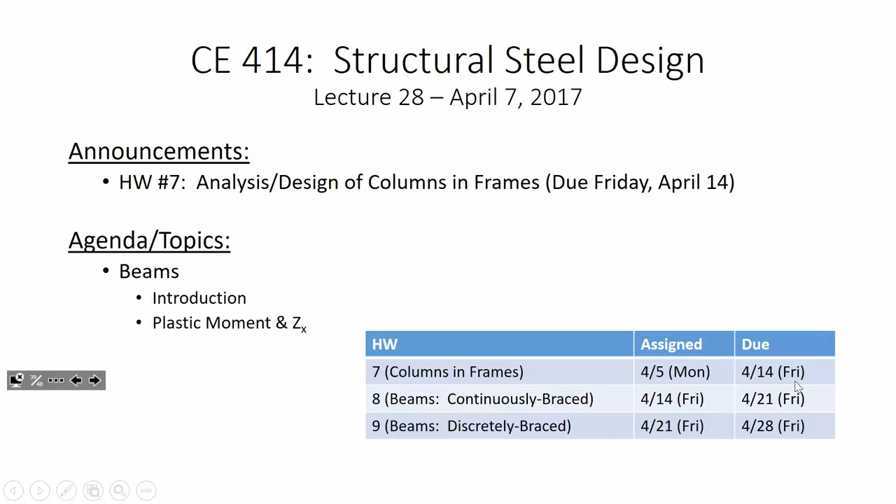Does anybody have any questions on homework 7? Because I know you all are almost done with it, right? Oh, so you've had plenty of time. I can just feel the sarcasm. I can feel it. All right.

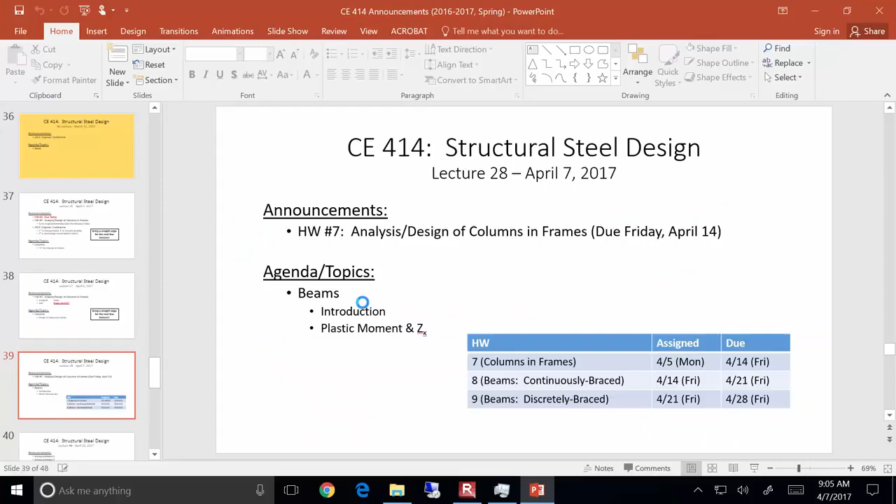Okay. Now, today, you get to see my best slide ever. My best slide ever. What's that? No, it's better. Better. Okay. So you're going to see it in your handouts. You're going to go, what's going on with this? And then you'll understand why.

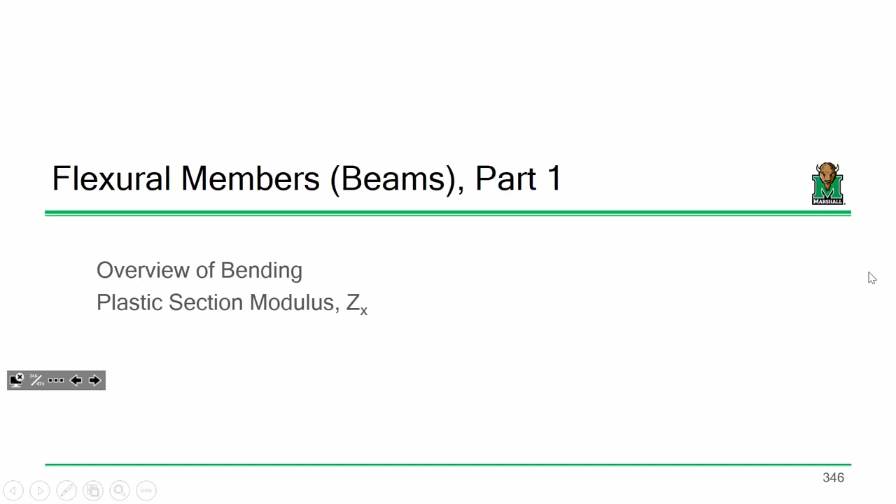Okay, so we're beginning our discussion on beams. And I want to just go over bending in general and also talk about a very important parameter related to bending, which is Zx, the plastic section modulus. To start out, let's just sort of take it one step at a time. So the big difference between tension members and compression members is that members in compression like to do this thing called buckling. Okay, tension members really didn't. That wasn't an issue, so we never really were concerned about the stability of a tension member, but we were with columns. Well, with beams, it's really no different.

I mean, with beams, you have a portion of the beam's cross-section that's in compression, the top's in compression, bottom's in tension, so a beam is going to want to buckle as well. Okay? Now, the way a beam buckles, or its buckling capacity, is a function of how far apart your braces are. Now, your braces could mean a number of things. They could mean cross frames. They could mean other beams tying in, the floor system itself. We'll get into that. But we will create a term throughout this discussion called the unbraced length, and we'll call that L sub b. And an L sub b is related a lot like a column's slenderness.

In other words, the longer LB is, the longer the space between braces in a beam, the weaker that beam is, okay? Because it gets more slender and it wants to buckle. However, because of the mechanics associated with beams, a beam may reach its full capacity before the beam buckling happens. Now, its full capacity takes a little bit of discussion.

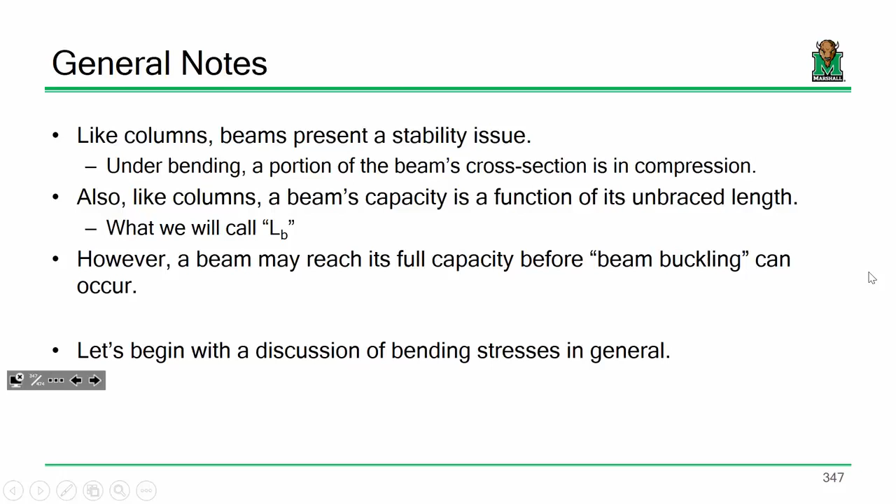It's not as simple, well, actually it is simpler mathematically than what you did in Engineering 216 when you took mechanics of deformable bodies. It's actually a little easier than the yield moment and whatnot. And I know everybody in here is an expert in mechanics of deformable bodies, right? You all love that stuff. But I will do my diligence and do a quick review of some of the stuff that's relevant in Engineering 216, just to bring everybody back up to speed.

So beams, I mean, if you graduate with an engineering degree, if you ask me, for any student graduating with a civil engineering degree or a mechanical engineering degree, if there's one topic that I want a student to understand, it's beams, period. Shear and moment diagrams, beam analysis, beam design, deflection, beams, period, in a nutshell. It's the one thing I want students to be able to understand because they're just so fundamental, okay?

Just about any system that you are designing that has forces on it, whether it's a building, a bridge, an airplane, a car, has some pieces in it, or the system itself is being bent in some fashion or another. There's something in that system that's probably being bent, okay? So because something's being bent, you have to understand how to handle bending stresses, okay?

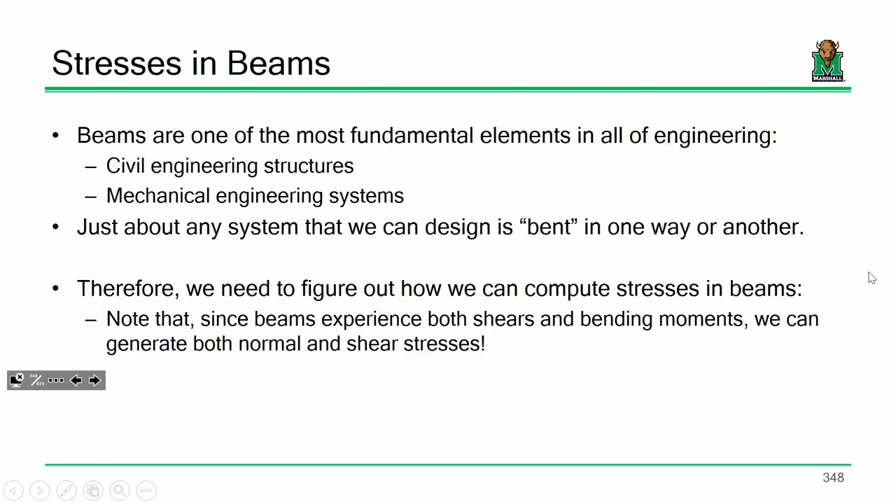Now, beams experience shears and moments, so they would develop shear stresses and bending stresses. In concrete design, we handle each of those independently, and we're going to do the same thing in here. We did bending moments first, and then we tackled shear. It's going to be the same thing in here, although the shear discussion that we have in here is going to be very, very short because there's not really a whole lot to say about it. So let's go back to fundamentals.

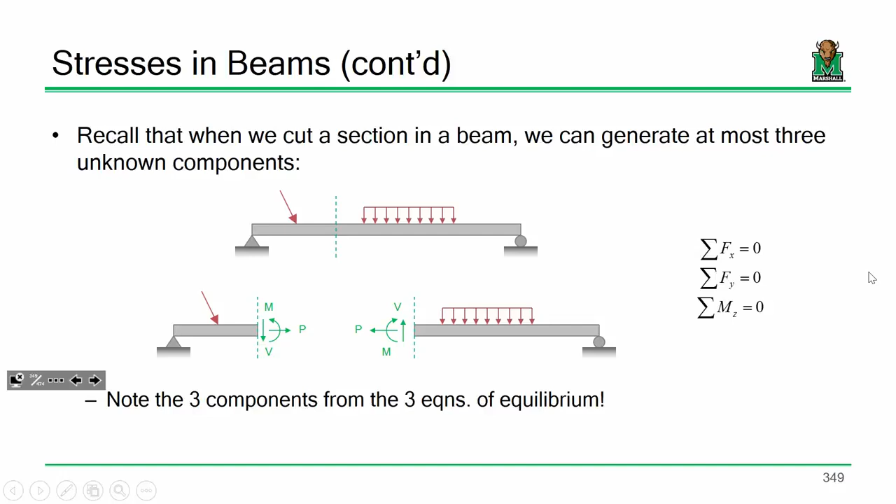So I have a beam, samurai sword, or lightsaber, or cake cutter, cutting through the beam. If I'm treating this as a two-dimensional system, then there are at most 3 unknown resultants inside the beam. Some unknown axial force, some unknown shear, and some unknown moment. Those 3 unknown resultants, I essentially solve for using the 3 equations of equilibrium, right? Sum of forces in the x direction, sum of forces in the y direction, sum of moments. 3 equations, 3 unknowns. That's structural analysis in a nutshell.

Now, as we'll see in a moment, I even put, no pun intended, on the slide.

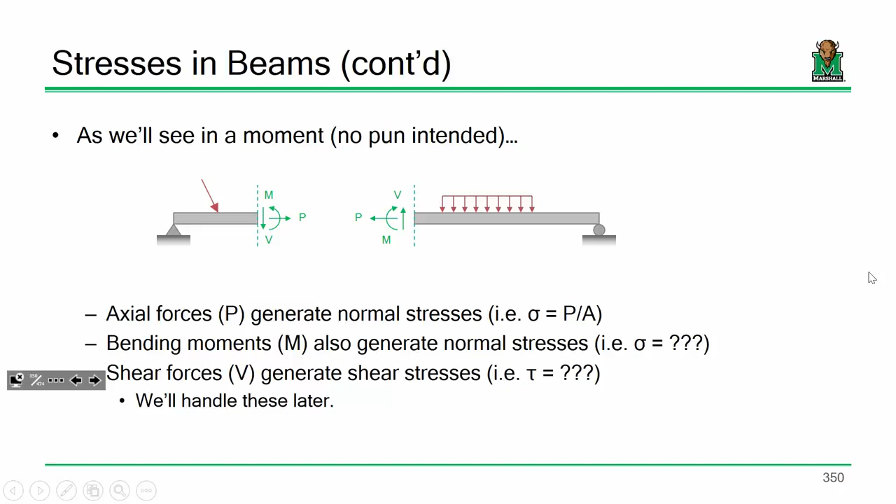Now, bending moments and shear forces generate normal stresses and shear stresses. The shear stress, I'm going to worry about that later, but right now I want to focus on that bending moment, okay? Now, in order to make these derivations, we're going to make some basic assumptions. One of them is linear behavior. We're going to assume that the beam is behaving linearly. The stress and the strain are proportional to one another, okay?

Another assumption we're going to make is strain compatibility, which if you haven't had concrete design in a while, it might have been a while since you've seen this, but if you're in it now, we've used this not too long ago. Remember how we used similar triangles to say, if we've got the strain at the top of the beam, we use similar triangles to get the strain in the steel or the strain in other layers. So we assumed that the strain was linear, right? That's essentially the same thing we're talking about here when we say strain compatibility.

That the strain profile is linear. So essentially, if you have a linear strain profile and you have linear elastic behavior in your material, then the stress should be linear. Make sense? You know, so just taking strain and multiplying it times a constant. In this case, that constant is Young's modulus. We're also going to consider small deflections or first-order behavior.

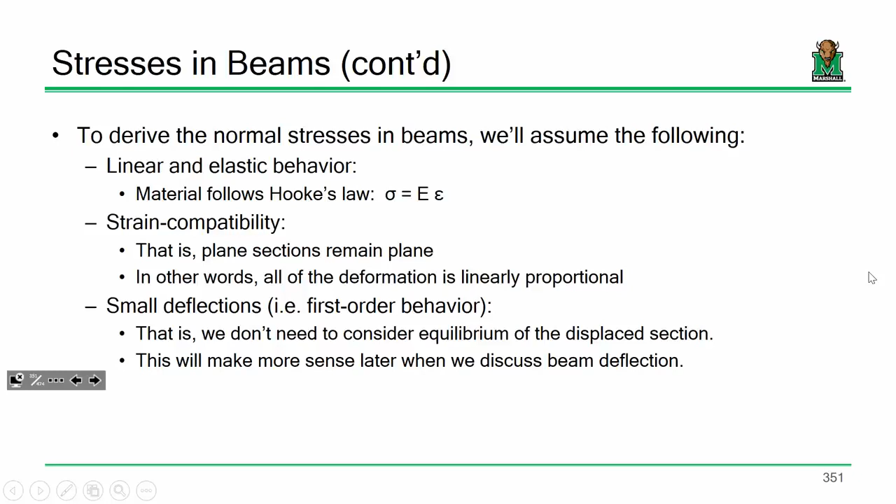Remember that example of the guy with the backpack, or me with the backpack, and Caleb doesn't like me very much, so he pushes me, and it makes me want to fall more than if I didn't.

So we're going to assume for now that first-order behavior is what governs. So if you use these assumptions, we can treat the problem as follows. Okay, so we have a beam that's being subjected to some loads or what have you, doesn't really matter. Now the beam has some arbitrary cross-section. So if I samurai sword, lightsaber, or cake cutter through the section and look, it could look like anything.

It doesn't really matter what it looks like. So I've got what solid mechanics folks refer to affectionately as the stress potato. It's a term. So it's just some arbitrary cross-section. Now notice how I've got that blue line going through what I'm calling the centroid of that cross-section. Now we can use statics or structural analysis to determine the axial force and the moment.

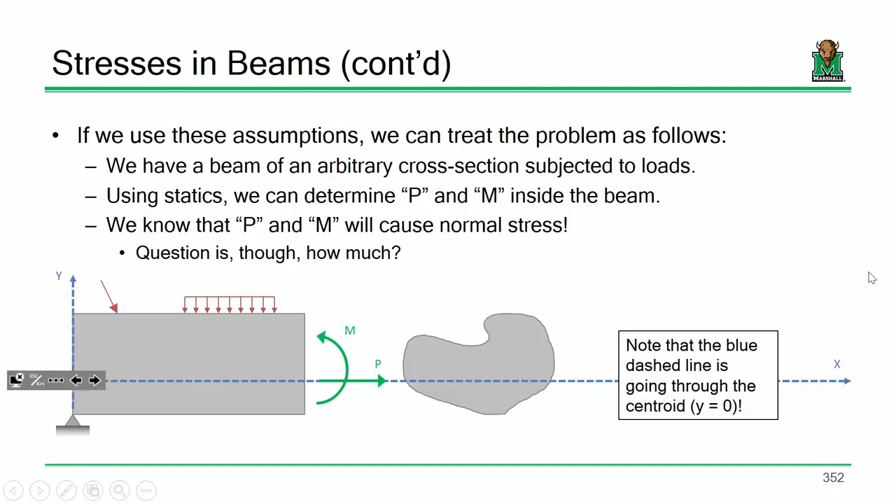Now we also know that those forces generate stress. The question is how much. Well, if we've got two unknowns, and we're assuming everything's linear, I propose that the stress profile along that depth should be linear in nature. Now, the equation of a line is y equals mx plus b, or some constant plus some other constant times y. And again, this blue dashed line is going through the centroid. The point is to try and define that stress profile. Sound good? I'm bringing it back to basics here.

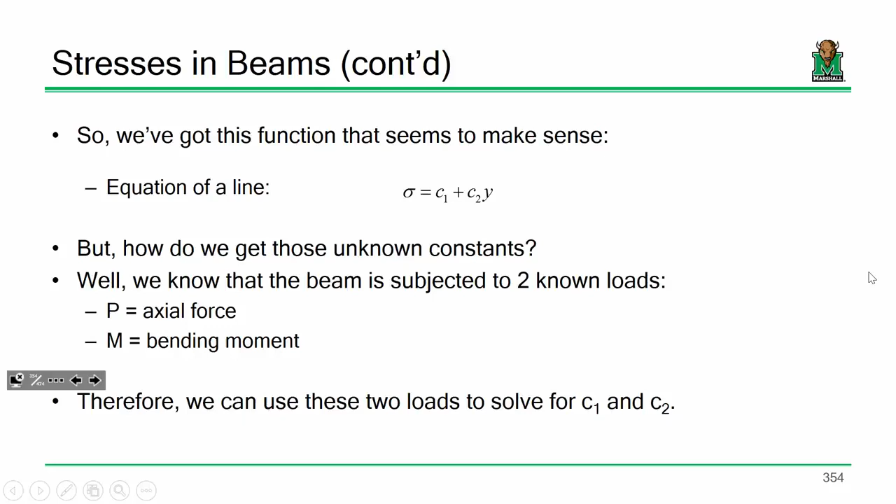So we've got this line. It seems to make sense based on all the assumptions that we've made, but we've got these constants. We've got two known forces, two unknown constants, two equations, two unknowns. We should be able to go to work. So how does this work? Well, essentially, you would go through and integrate your stress profile, plug and chug, and it's not so bad when you chug it out.

You end up getting that your first constant is P over A, which is normal axial stress, which is, I believe, what everybody is fairly familiar with at this point. And then your second constant is M over Ix. Remember, Ix is your moment of inertia. So your stress profile is P over A plus My over I. And I have got to believe that everybody remembers sigma equals My over I. That is fundamental from mechanics.

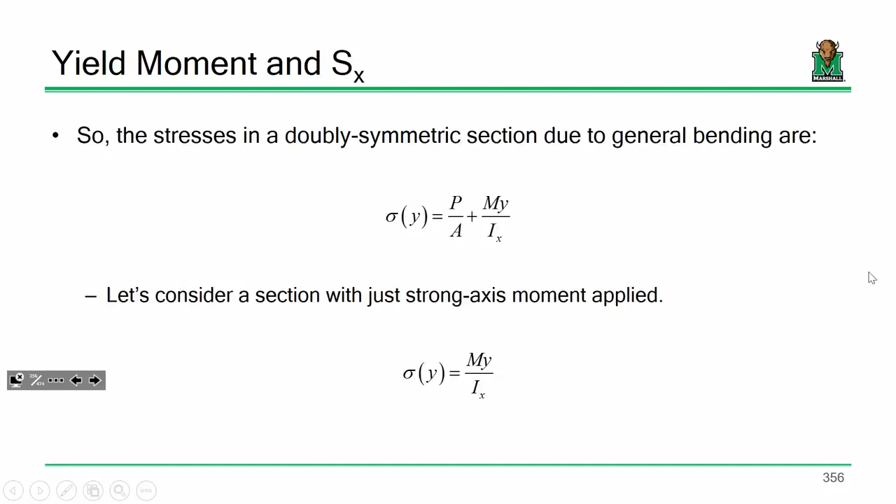Sound good? So if I've got axial forces, bending moment, shears, what I'm saying is that your normal stress in that beam is P over A plus My over I. And if you don't have any axial force on the beam at all, it's just My over I. So My over I is your fundamental axial stress equation for a section subjected to bending. It is a function of the bending moment applied, the moment of inertia, and the distance y that is measured from the centroid. Remember, our blue dashed line was going through the centroid, so that's where bending stress is 0. Make sense? Sometimes that axis is called the neutral axis, because everything on one side of the axis is in compression, everything on the other side is in tension. Right there is where there is no stress or no strain.

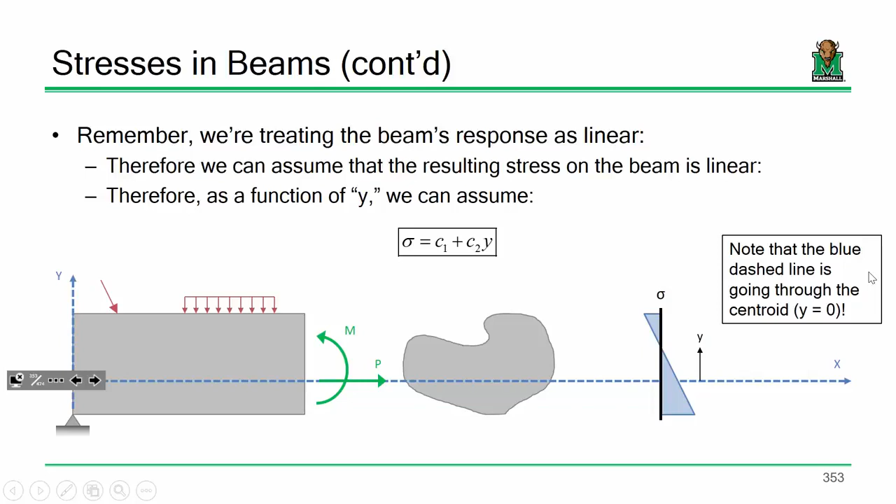Yes? The blue dashed line on the potato was kind of through its centroid, but you said 0 stress at the blue dashed line, but the potato is not.

Okay, that's a good question. The reason why is because of the presence of P. See that? This is a blown up version of the total stress. And I'm saying that the total stress equals P over A plus this. In other words, if I take that beam and I just apply an axial load to it, it doesn't matter where the centroid is. I'm going to get stress right there, and it's just P over A. If, however, there is no axial load, then this term goes to 0. I'm saying that the magnitude right there is P over A. So with no P, this stress profile turns into that. That's a great observation. Does everybody else understand that?

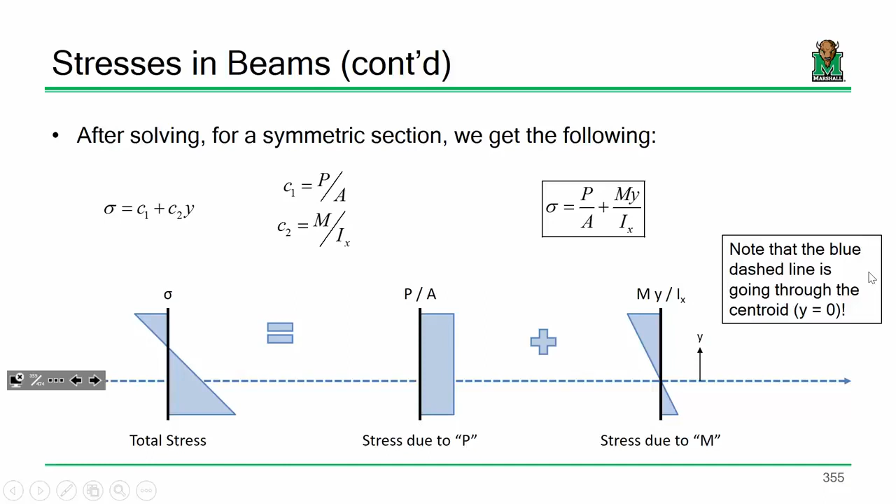Everybody good? That's a good observation.

Okay. Now, if I have a beam that's not an arbitrary cross-section, if I have a beam that's symmetric, let's say like an I-beam, then the actual middle of that beam, half the height, that's where the centroid is. So the maximum bending stress is going to be either at the top or at the bottom. It's going to be the same value, just different signs. One's going to be in compression, one's going to be in tension.

Sound good? Okay. So in order to determine that, I'm using sigma equals My over I, and my y distance is d over 2, or half that depth. Sound good? Okay. Now, if I rearrange my fraction a little bit, I have M divided by the following quantity, the moment of inertia divided by half the depth. For symmetric I-beams, for doubly symmetric I-beams, that has a very special name. We call it the section modulus. We call it S sub x.

Everybody turn to Table 1-1. I want you all to see this in the manual. Just any I-beam, it doesn't matter. Everybody see that? You should have that tabbed, right? The W sections. Now go to axis XX or axis YY. It doesn't really matter. For each of the axes, you should have 4 properties. You have a moment of inertia, I. You have a section modulus, S, which if you want to calculate S for a given beam, just take I and divide it by half the depth. It'll work. Now, you have a radius of gyration, right? Everybody recognizes that, but what's the other one? Z. What is Z? We're going to get to that today. Sound good?

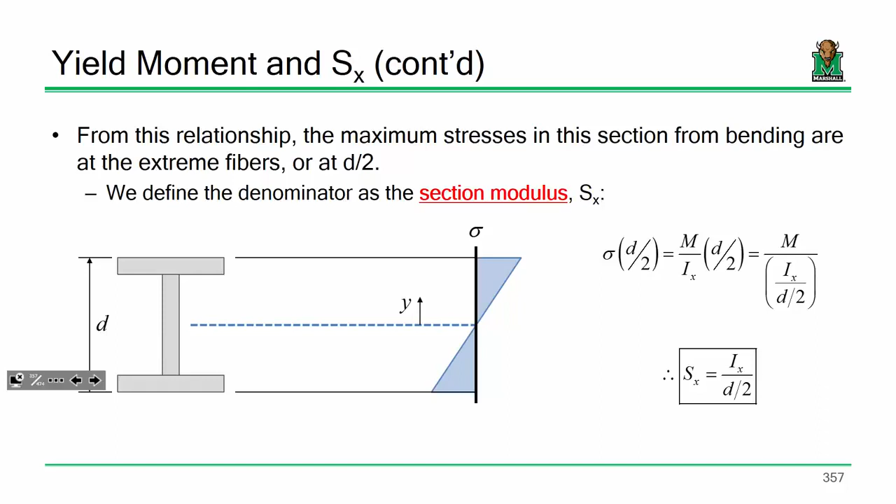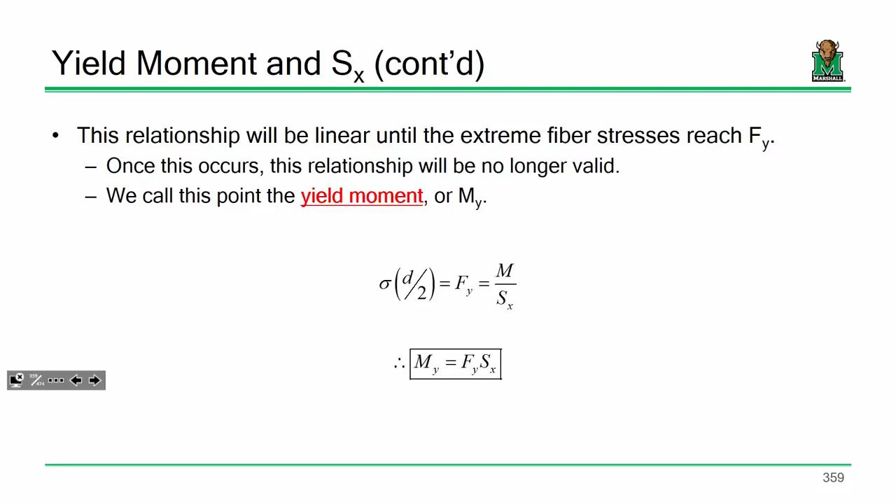Okay. Now, is everybody in agreement that in elastic behavior, the bending stresses look something like this? Everybody in agreement with that? So where are the largest stresses? Top and bottom, right? So if I limited the stress up here to, let's say, the yield stress, seems like a pretty reasonable limit, I can say, all right, let's set that stress equal to Fy and solve for the moment, and I would then compute what's called the yield moment of that section. So the yield moment would be the section modulus times the yield stress. Everybody okay with that? Okay.

Now, first off, just from a notation standpoint, if the section was singly symmetric, we would not have just a yield moment. We'd have a yield moment for the compression flange and a yield moment for the tension flange, and when we do our calcs, we just take the lowest. Everybody okay with that? Okay.

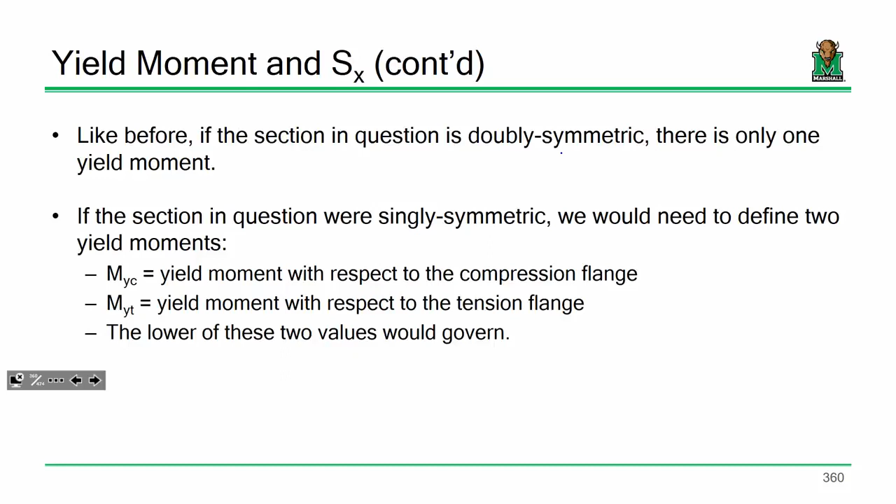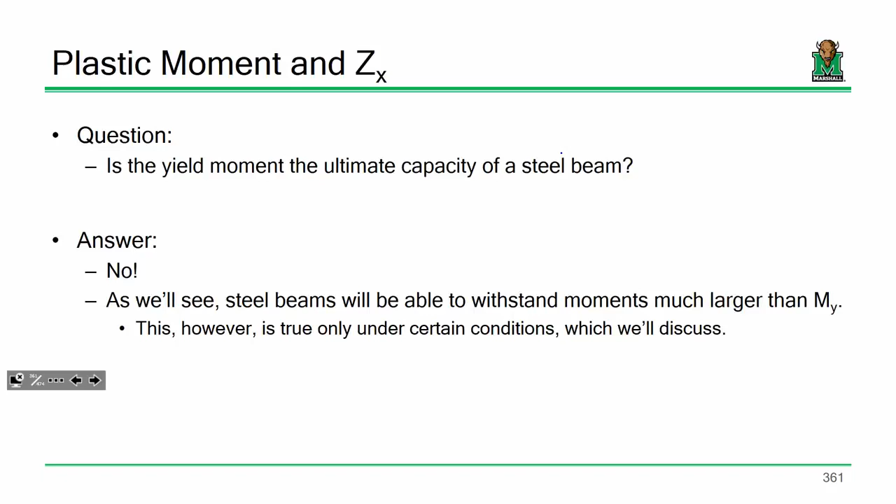Now, let me ask you this. Is the yield moment the ultimate capacity of a beam? And I'm saying the answer to that question is no. No, with an exclamation point. I should have put a triple exclamation point. Steel beams can withstand bending moments far larger than their yield moment. Now, that's only true under certain conditions, specifically if they're braced well enough, and we'll get into that. But I want everybody to be clear that beams can withstand moments far larger than their yield moment. Okay.

Here's my best slide. Okay, now if you look at it in the handout, it looks a little weird. There's a reason why it looks a little weird. Okay, all right. So let's say we have a steel beam, okay?

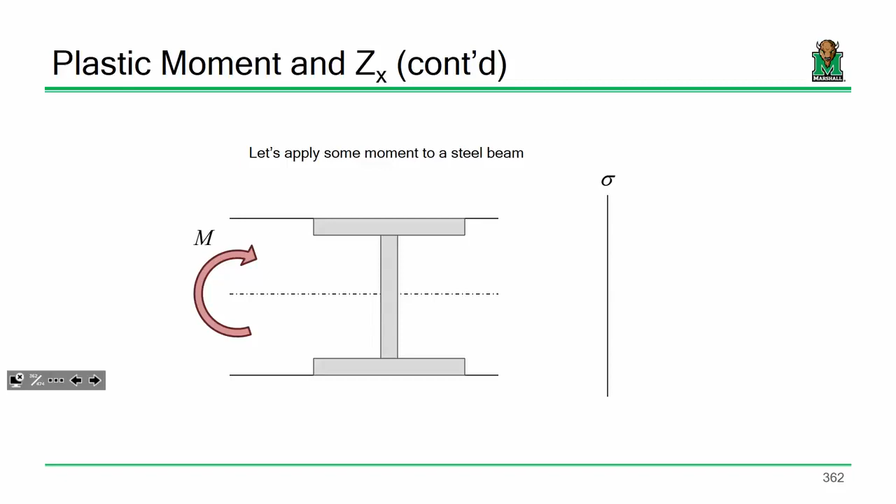Now we apply some moment. Here on the right, I've got the bending stress profile. So let's take that beam and start to bend it. What happens at the very beginning is the bending stress profile does something about like that, okay? It behaves linearly until the top and the bottom reach a point called Fy, okay?

So at that point, the beam has behaved elastically, and we've reached the yield moment at the top, okay? We call that the yield moment, when the top and the bottom reach Fy. Sound good? Now, my question to you is, what happens if we keep applying moment? What if we just kept bending it?

Well, we're going to do it, but let me ask you this: would you agree that the beam has yielded right at the tippy top and way down at the bottom? We've reached yielding here and here. What about, let's say, right there? Have we reached yielding there? This can do just fine, right? Same thing here and here and here. The middle part of the beam is just fine.

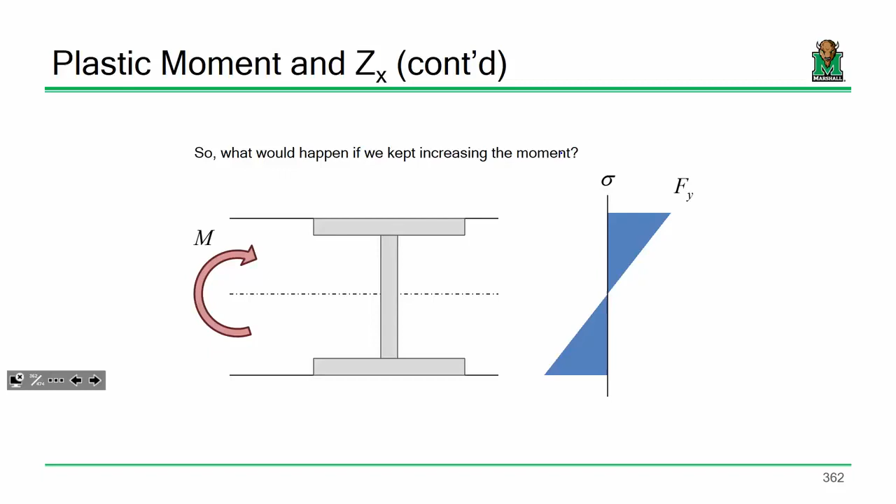So what I'm saying is, here's the beam at the yield moment, but if we keep increasing the moment, it's going to do that, okay? That yielding is going to penetrate throughout the section until we've yielded the whole thing, okay? That is the ultimate capacity of the beam, and we call that the plastic moment, okay?

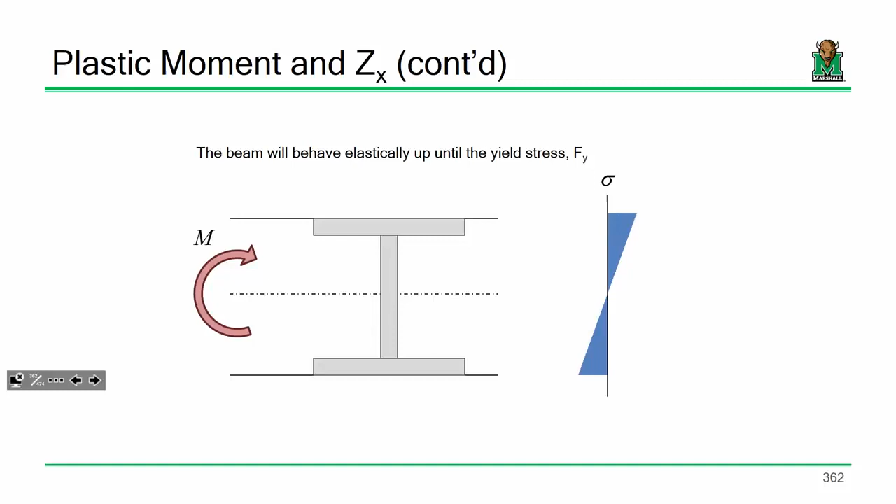All right, so here we go. All right, so what happens if we kept increasing the moment? Well,

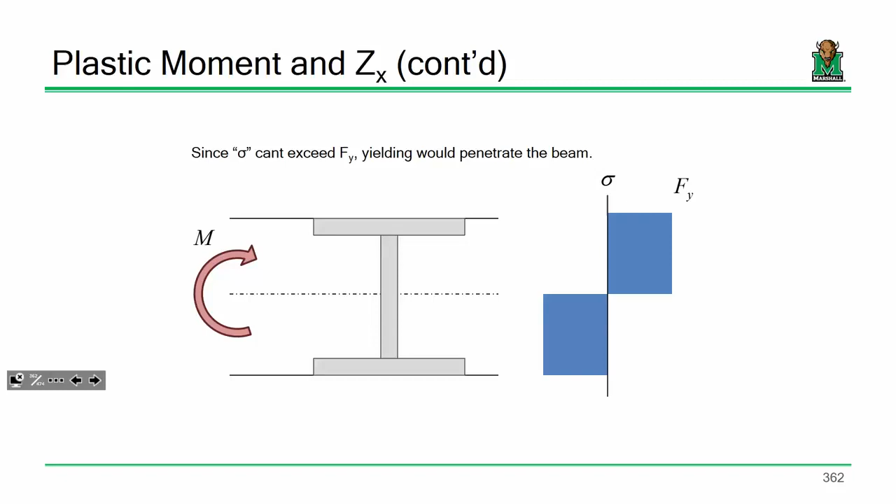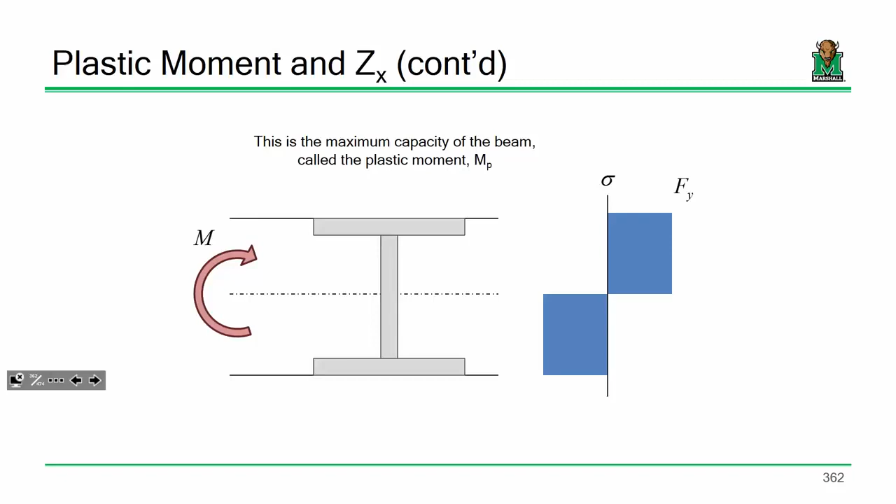I had that there. I should have had the soundtrack throughout the whole thing, you know. All right. Maybe I should have had the... Anybody remember The Price is Right? Remember the yodeler music? As it's yielding. Yeah. They don't do that when we do modeling, do they? I don't know. I don't think they do. I'm behind on my Price is Right. I just remember Plinko. That's all I remember.

All right. So going back to steel design, what I'm saying is that the plastic moment is really the largest moment that a steel beam can take. In other words, if there was a beam right above me and it was loaded up till the yield moment, I'd be perfectly fine with taking a nap under that beam. But if the beam was experiencing its plastic moment, I'm out of there. Okay.

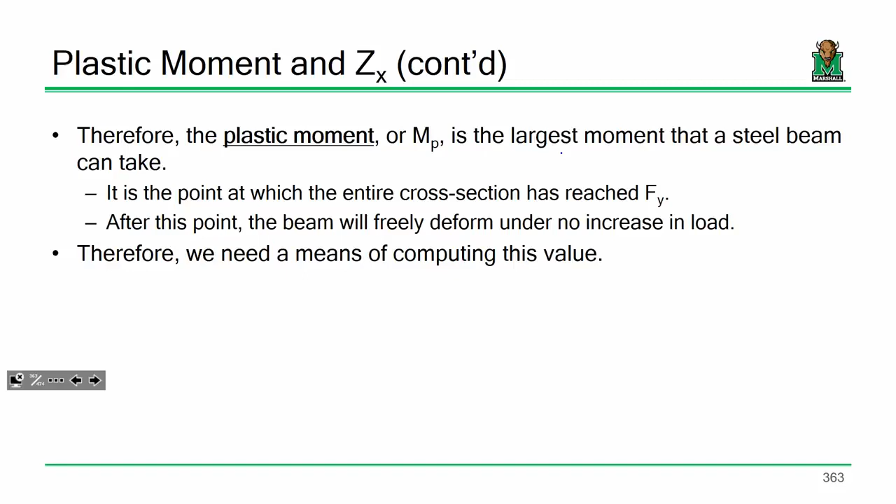What's happening is this is when the entire cross-section has yielded, so the entire cross-section is free to deform. If you have a point in a beam that has reached its plastic moment, in the world of structural engineering, we say that it has developed a plastic hinge at that point. And it sort of behaves like a hinge because it freely rotates, right? If it can't resist moment, I mean, in structural analysis, what was a point on a beam that could not resist moment? What do we call that point? A hinge. So, pin, hinge, it's the same thing.

All right. We need a means of computing this value. Okay. Now I'm going to spit out a new term to you. The elastic neutral axis, and I'm calling it the elastic neutral axis just to differentiate. The elastic neutral axis of a cross-section is where the centroid is, which I think everybody in this room knows how to compute: sum of AY over sum of A. The plastic neutral axis is where the compressive forces equal the tensile forces.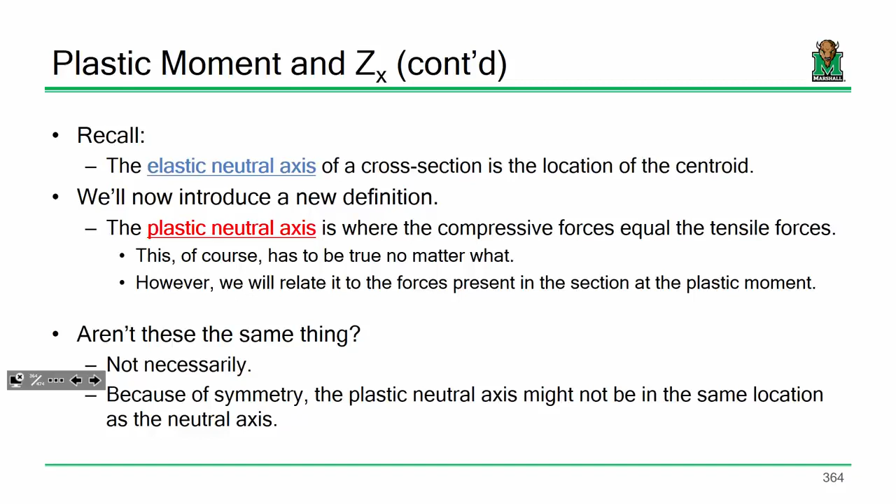Now, that's got to be true no matter what, but we're going to be able to relate this to what's going on in Mp. Now, aren't these the same thing? I mean, doesn't the centroid and where the area or the compressive forces equal the tensile forces, isn't that the same thing? Not necessarily, okay? Because of the symmetry, it might be there and it might not.

In other words, if I have a doubly symmetric cross-section, like a wide flange shape, like a W10x49, and I compute the centroid and the plastic neutral axis, they're in the same spot. Here's where the centroid is, and then if I look over here, everything in compression equals everything in tension, so it's the same spot.

But if I make that a singly symmetric cross-section, the elastic neutral axis and the plastic neutral axis are not necessarily in the same spot. Because once I start yielding throughout the cross-section, that plastic neutral axis starts to shift, and it's got to shift to maintain the fact that compression equals tension. And at Mp, they might be in different spots, okay? So that's something to be aware of, okay?

Plastic neutral axis change? What's that? Why does it change? Because as you start yielding throughout the cross-section, it's got to move in order to maintain the fact that compression's got to equal tension. And the only way for equilibrium to be maintained is for that axis, the point where compression gets split up into tension, to move. It's just physics. And if you're having a hard time going, well, wait, is that always the case? We have an example where we're going to look at that.

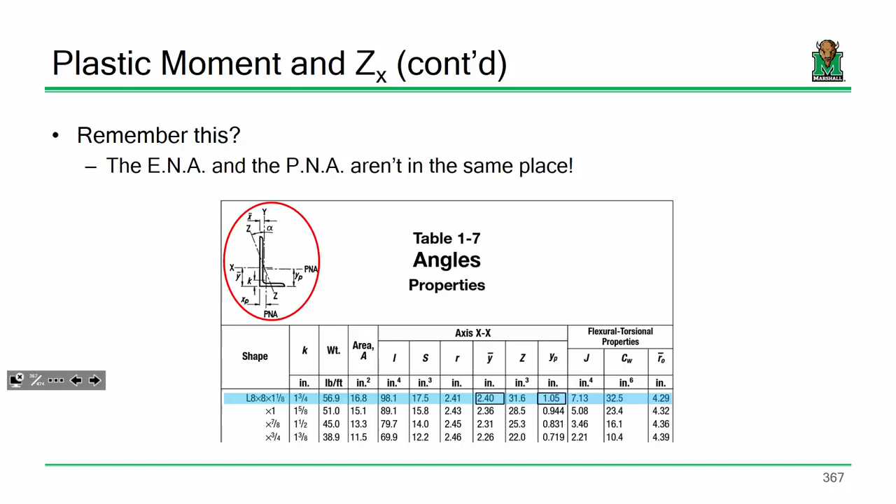It stays the same, yes, if it's symmetric. If it's something like a W shape, if it's a channel being bent about that axis, any time it's symmetric about that axis, you've got no issues. But if it changes, if you've got something like this where the top flange is a different size than the bottom flange, they won't be in the same spot. And I'll be able to prove that to you here in a little bit. Sound good? So just bear with me. We'll see how this works out.

Okay. Now, all right, so let's talk about this. Once we determine where the PNA is, we can do this by summing moments. Now, the plastic neutral axis is essentially where the forces in compression equal the forces in tension. This should not be an off-the-wall calc for you all because we've been doing this in concrete design all semester. Right? What are your compressive forces? 0.85 f'c a b, and then your tensile forces are As Fy, and then you determine what is that a distance such that C equals T, right?

Now, we had to deal with forces and stresses in concrete design because we were dealing with a composite beam. We had concrete and we had steel. We had two materials. Here we don't. Everything is the same material. And usually, in most cases, everything is the same yield stress. In other words, we've got 50 ksi steel, let's say, across the board. So it actually becomes a little easier because instead of trying to find the location where the forces up top equal the forces below, we could say, let's just find the point where the area above equals the area below. In other words, whenever this area above equals this area below, we're good. That's where our plastic neutral axis is.

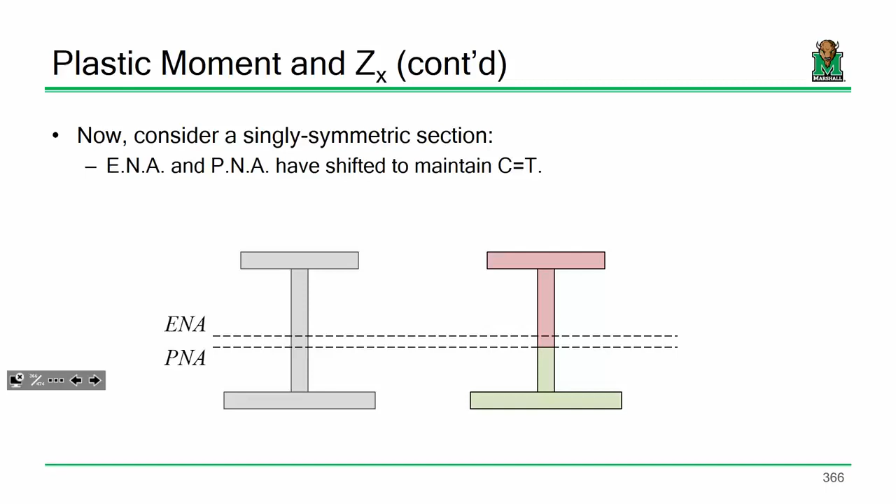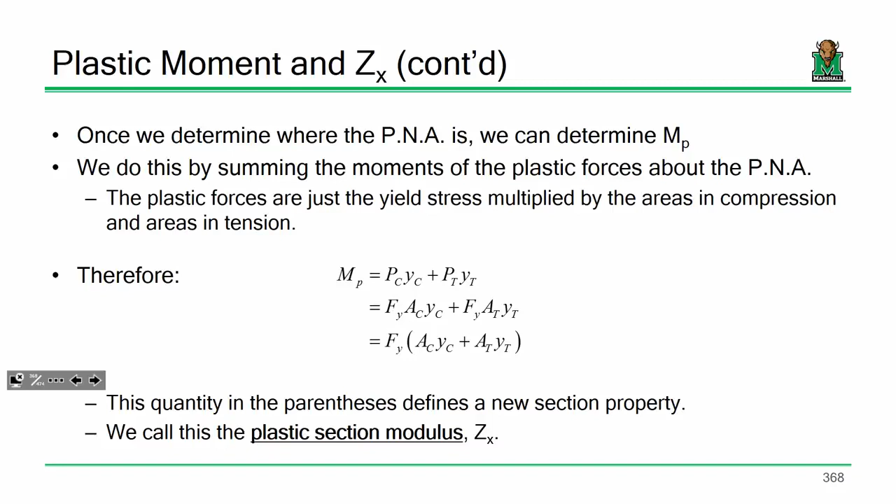Okay? Now, in order to determine our plastic moment, what do we do? We sum moments. I mean, how did we do the concrete beam analysis? We said a force times a distance, right? Make sense? All right. Well, if I look at this diagram, I'm proposing that the plastic moment is this compressive force times its moment arm plus this tensile force times its moment arm. Pretty much the same thing we did in concrete design. Now, because it's steel and because it's the same yield stress, I can factor the yield stress out. So if I look at my equation here, I've got compressive force times moment arm plus tensile force times moment arm. I factor out the Fy, and all I've got is area times moment arm plus area times moment arm. That term inside that set of parentheses is a section property. I'm calling that section property the plastic section modulus, Zx. Okay? Does that make sense? Everybody okay with this so far?

Now, Zx, I want to be clear, is only meaningful if the beam is made of a single material. Okay? In other words, if I'm using all 50 ksi throughout, we call that a homogeneous beam. Any time that we're using the same material across the board, Zx becomes meaningful. It is a very real possibility that you're doing, let's say, a highway bridge design, and you use 50 ksi steel for the top flange and for the web, but for the bottom flange, you use 70 ksi steel.

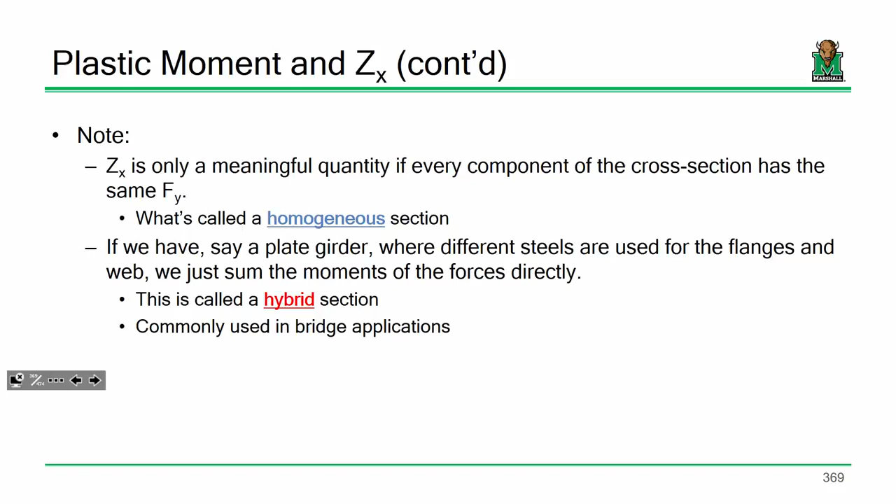That's very possible, okay? And in that realm, Zx really wouldn't have much meaning because Zx is a geometric property of the shape. And since the shape has different yield stresses, it really doesn't help you very much. That type of beam where you have different grades of steel and different components, we call that a hybrid section. So if you ever hear me talk about hybrid girders, that's what I mean. Sound good? All right.

So here's an example. Okay, so I have a beam and it's got different plate sizes across the board, and I want to determine Zx, and I want to determine the plastic moment. So I got a 12-inch by 1.5 inch top flange. I got a web that's 18 inches by 1 1/4, and the bottom flange is 16 by 1.75. Everybody good? Okay.

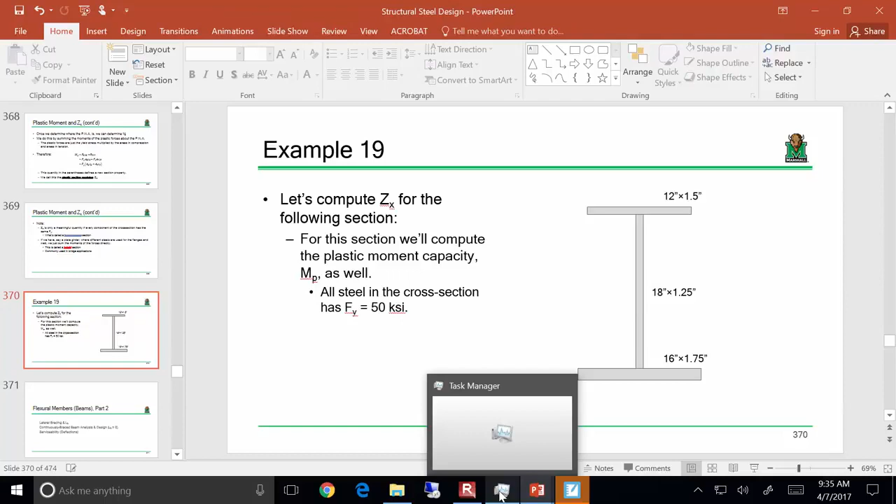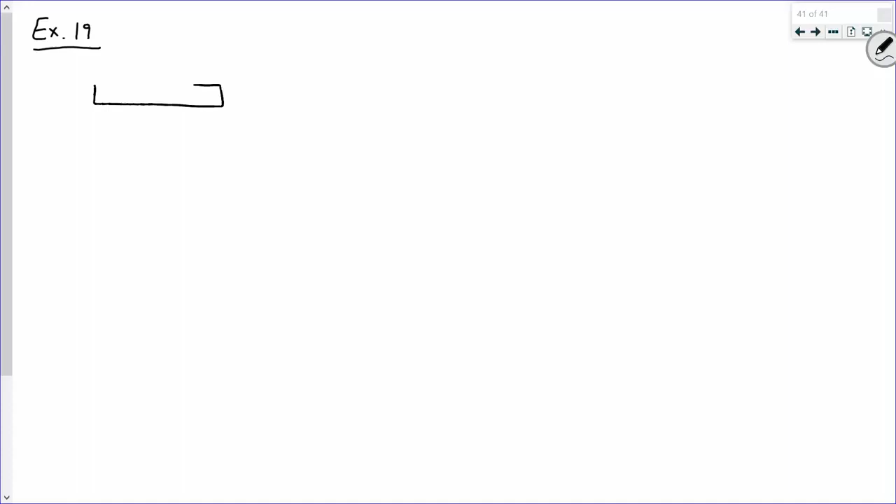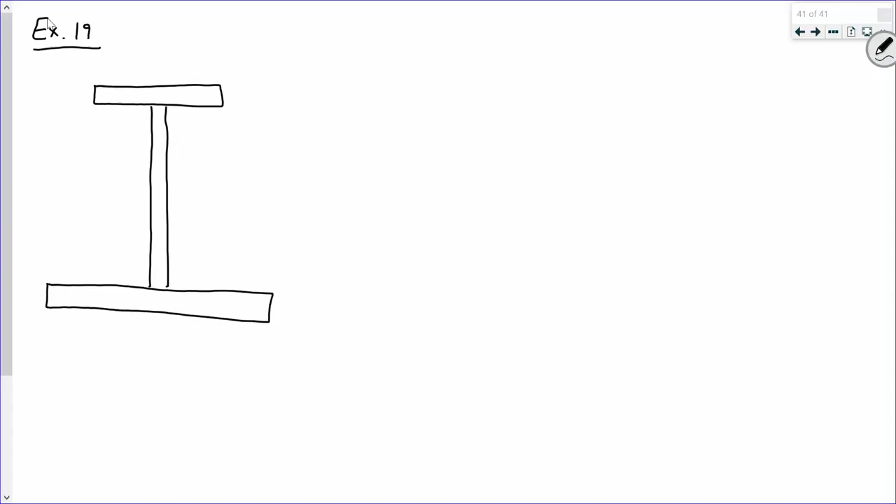Okay. All right, so here's what I'm going to do. Okay, so here's our beam. Now, what I'm trying to do is find this magic line where the area above equals the area below, okay? So here's how I'm going to do this. Let's start off by labeling some things. So this was what, 12 times 1.5. This is 16 times 1.75. And this shape is 18 times 1.25. Sound good? All right, now,

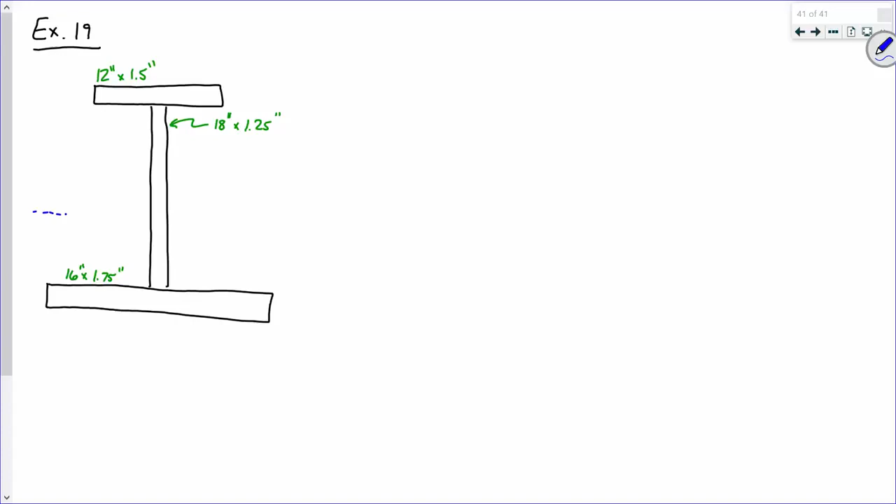I'm going to take a wild guess and say that the plastic neutral axis probably falls somewhere inside this web. So we'll say that that is the plastic neutral axis. Sound good? Now, how far is that distance? We don't know, right? When you don't know something in mathematics, what do you tend to call it? X. So this is X. Now, if that is X, what is this distance? 18 minus X. Not too bad, right? Simple stuff.

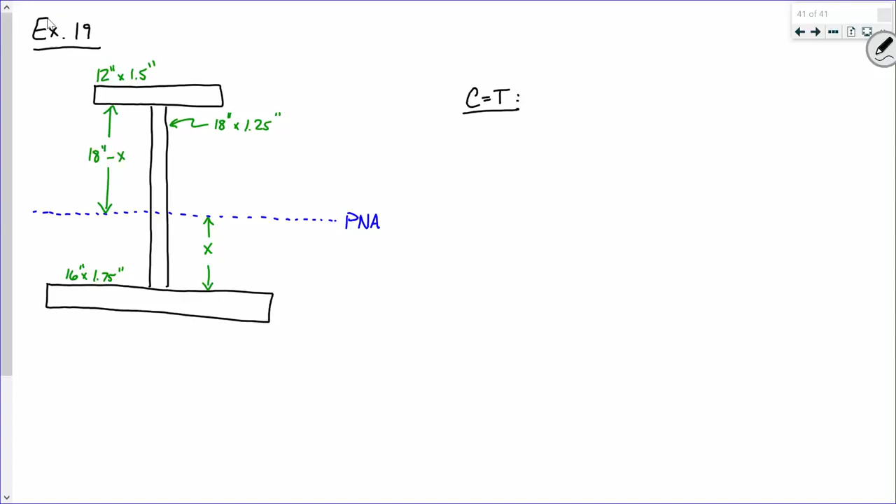Now, if compression equals tension, we can handle this pretty easily. In other words, all the area above has to equal all the area below. So let's take care of the area above. If I wanted to write an expression for the area above that line, what would it be? All right, 12 times 1.5. And for the sake of brevity, I'm just going to leave the units off since everything is all in inches. So, okay, so 12 times 1.5 plus there we go. Equals what? So what about the bottom? Plus not bad, right? Sound good?

So let's deal with the left. So 12 times 1.5 is what? All right, hold on. I can do better than that. Plus, okay, so we got to FOIL or distribute that multiplication. So we got 18 times 1.25 and 1.25 times x. So what is that? So what's 18 times 1.25? Say it again.

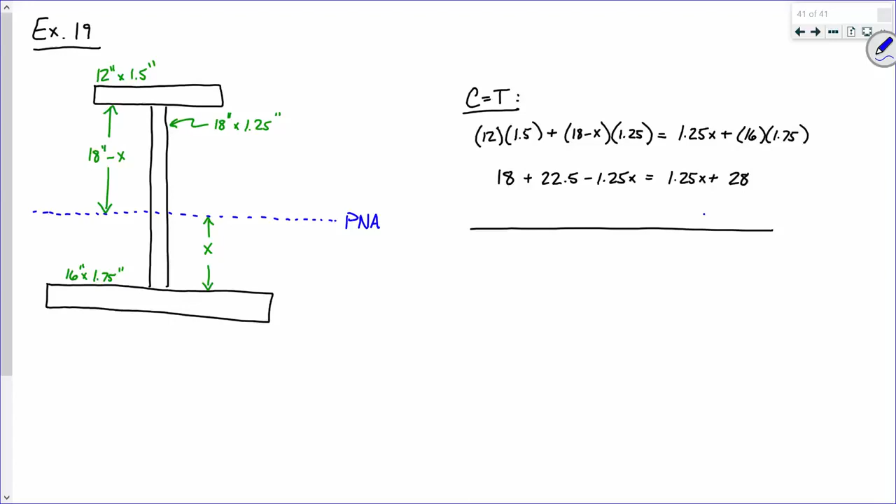Did you just go Casio FX 115 ES Plus? Is that what you just did? And what's 16 times 1.75? 28. So here's what I'll do. All right, I'll say let's subtract 28 from both sides. So subtract 28, and then let's add 1.25x. So over here on the right side, 1.25x and 1.25x makes 2.5x. The 28's cancel. And on the left, I have 18 plus 22.5 minus 28, which is,

All right. Okay. Now to determine Zx is really simple. You literally just take each shape one at a time. So what I'm going to say is we've got 1, 2, 3, 4, each flange, and then the web above and below our plastic neutral axis, and just sum moments and add it up. So let's just start at the top, work our way down. So the area is 12 times 1.5. Now, what is the moment arm from the plastic neutral axis to the center of that flange? 13.75. So I'm going to say it's 13 plus 1.5 over 2. Does everybody see that? So you start here, you go up 18 minus 5, and then go up another half a thickness. Sound good?

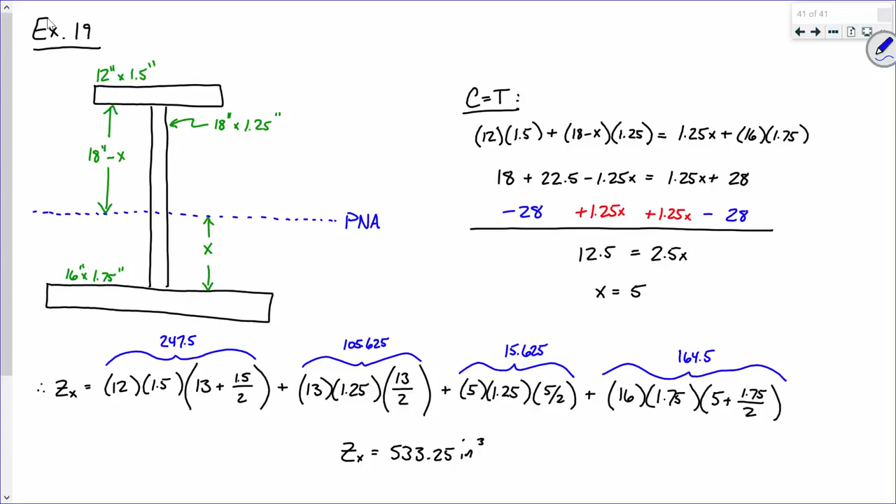So in order to compute the plastic moment, we would say Fy times Zx. So it would just be, let's say, 50 ksi times 533.25 cubic inches. So what units is that going to come out to be in? It's a moment. Inch kips, right? So let's convert that to foot kips. So what do we get?

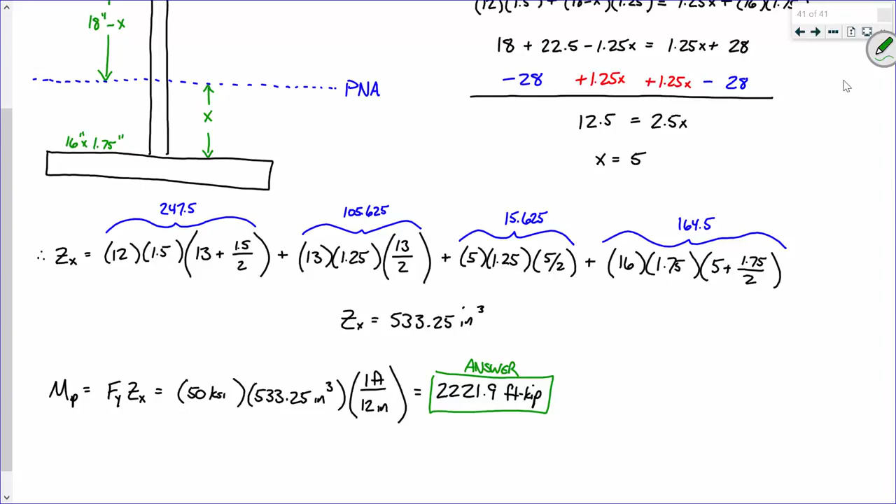Not bad, right? Sound good? Straightforward, right? Any questions for this? We got a lot more to cover. Am I good to just do a couple slides before we leave?

I can't hold on. I can't hold on for one moment. We got too many moments as it is. Now that one, that's a good one. It could probably have been worded a little better, but that was good.

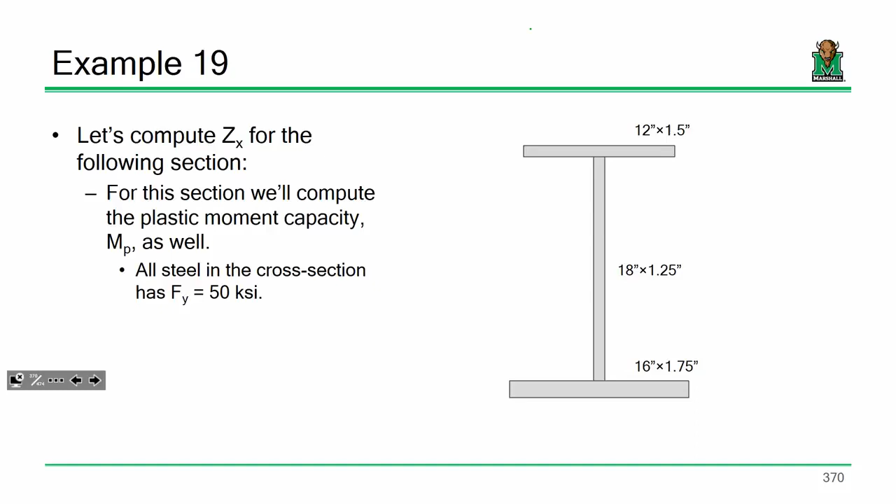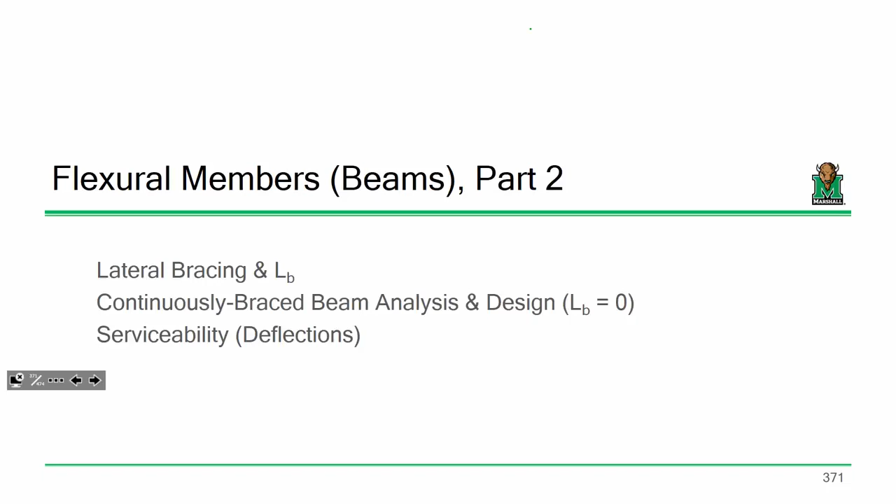So if you understand that, then computing capacity is pretty straightforward if you're not considering stability. Everything that we just did assumes that the beam will not buckle, okay? And so for our first instance of design with beams, let's just say we are going to assume that beam buckling is not an issue. Then we're going to go back and say, well, what if you had to consider beam buckling? How would you do it? Okay? Now, in order to frame our discussion and make sure that we're talking about the same thing,

Now, I didn't even notice that one. That one was pretty good.

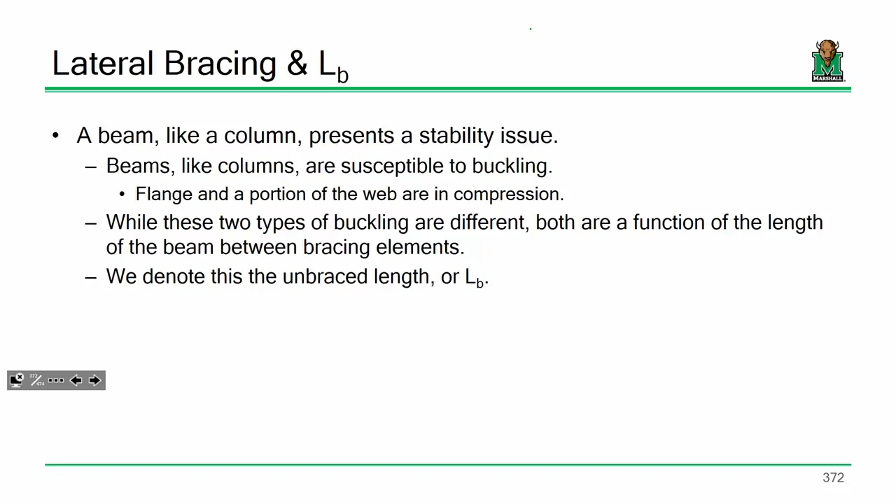All right. We need to discuss lateral bracing. We need to discuss the unbraced length of a beam. Now, L sub B, I want everybody to be clear on this. This is very important. L sub B is not how long a beam is. L sub B is the distance between braces. You could have a 40-foot long beam that's braced every 10 feet. Okay? So I want everybody to be clear on that. L sub B is the distance between braces. Okay? We call that the unbraced length.

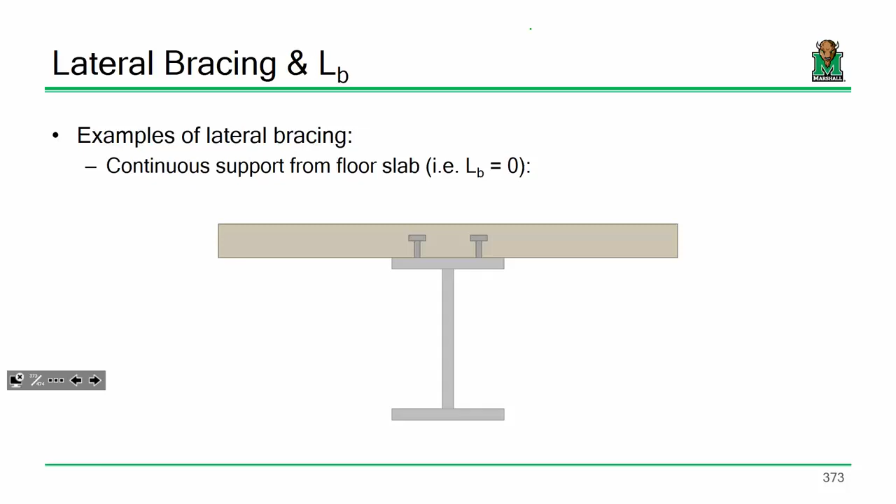It is possible that a beam has an unbraced length of 0. For instance, if you have a situation like this where you have a beam and you've got, let's say, shear studs cast into the concrete deck, that deck is fully preventing that compression flange, that top flange, from buckling. It can't move at all because the shear studs are fully locking up with the concrete. So in this instance, L sub B would be 0. Okay? That's point one.

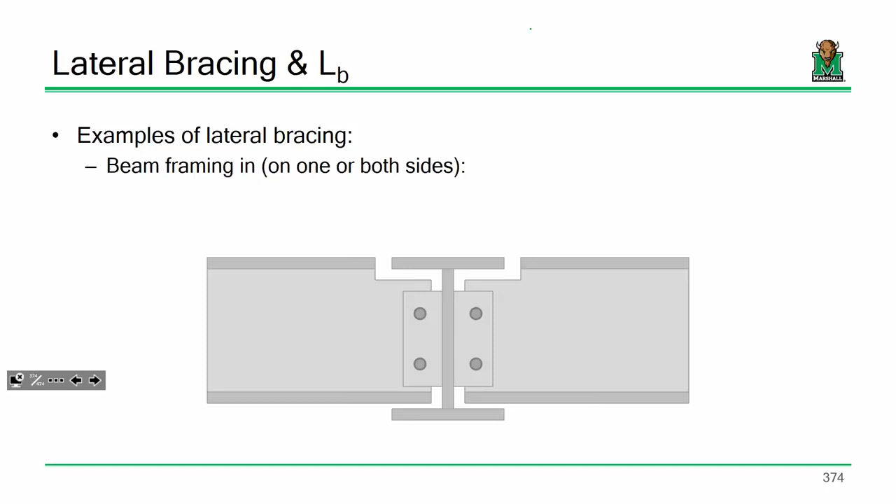An example of lateral bracing could be other beams framing in. So for instance, if I've got a floor system, I might have, let's say, a 30-foot long girder, but its unbraced length might be only 10 feet because from here, 10 feet, there's a brace. 10 feet, there's another brace. Okay? Those beams framing in act as braces. Okay? Does that make sense? Everybody okay with that? Didn't like braces? Neither did I. I feel you there. All right. Does that make sense, though?

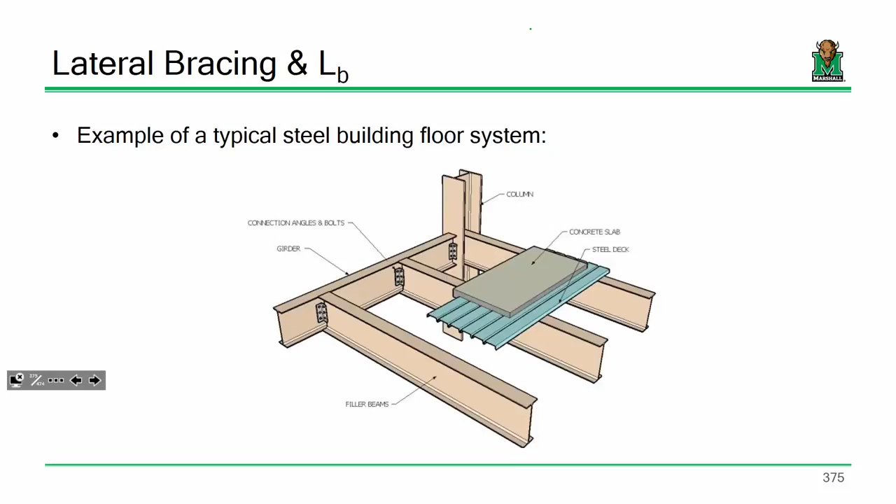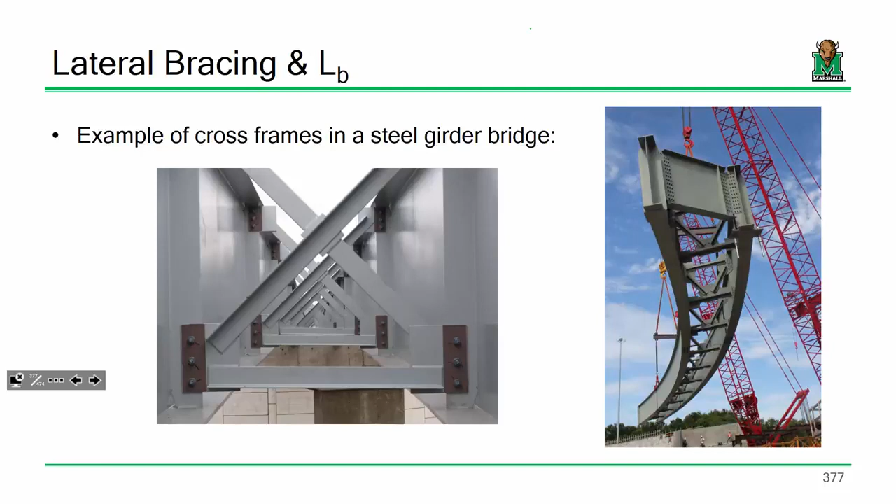Okay. Another instance of a lateral brace is a cross frame, very common in bridge applications. So, for instance, this element is probably a couple hundred feet long, something like that, depending upon the scale. But the unbraced length of this element is however far apart the cross frames are. Does that make sense? Everybody okay with this? For our first elements of design, when it talks about beams, we're going to assume L sub B equals 0, and that buckling is not an issue. We will then handle beam buckling later. Okay? So we're going to take it one step at a time, to sort of ease into it. Sound good? That's all I've got for you.